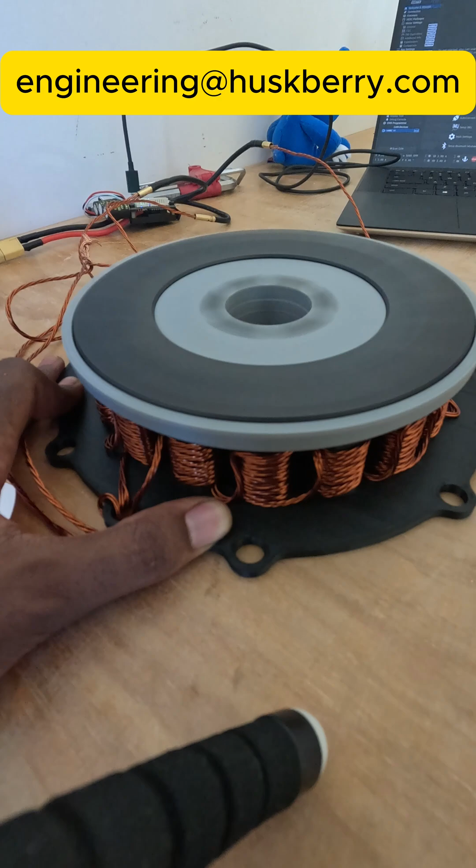I've been working on an electric motor for the last 3 years, and I've gotten to a point where I am ready to start prototyping.

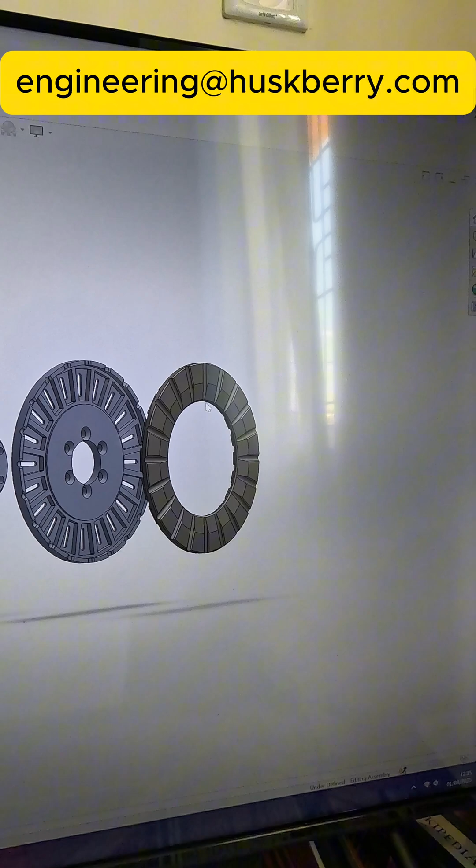So this is the rotor section. The rotor section rotates, and it happens to have trapezoidal sections of permanent magnets, arranged in alternating order: north, south, north, south, north, south, all around the circumference of the metallic disc.

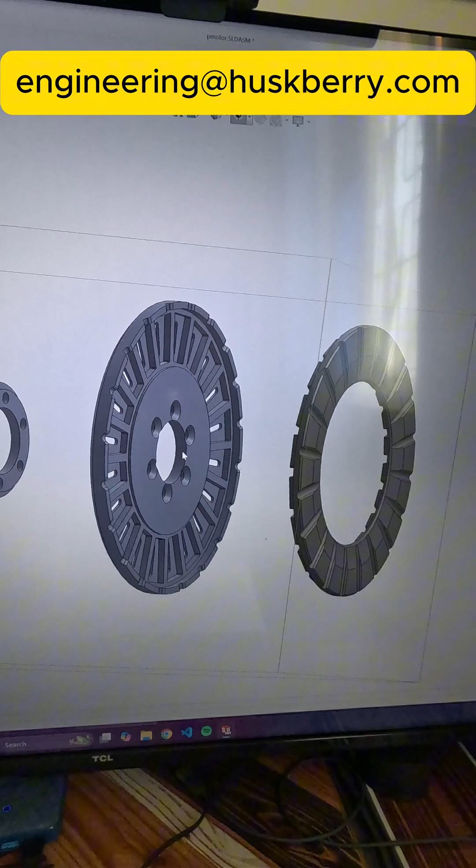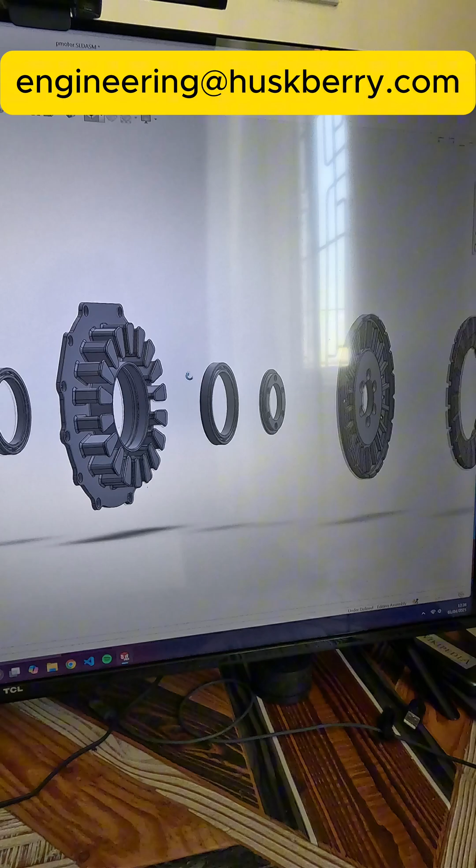This is a plastic disc that I'm going to temporarily use to test this. It's currently being 3D printed. I have some bearings here, and the bearings hold onto the shaft, which is this. Then this is what we call the stator. The stator holds onto the copper windings, which help to commutate or rotate the motor, given a couple of signals from a controller.

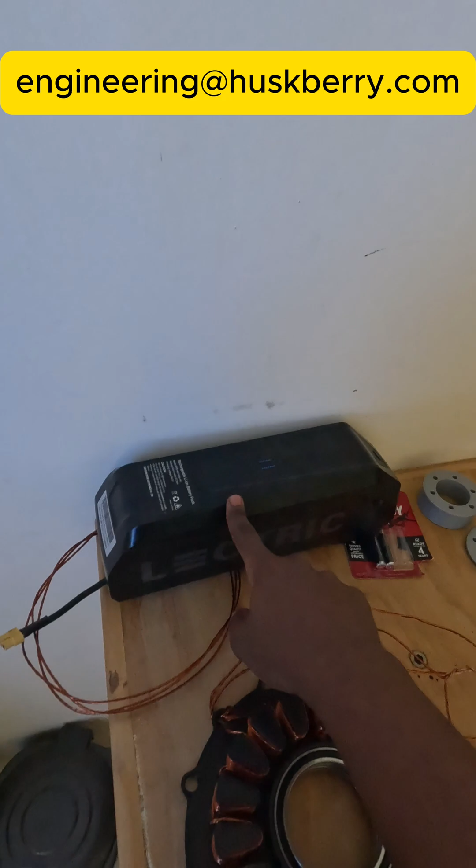Let me move on to my workstation. I have my 48-volt battery, which came from an e-bike battery. This is the stator you were seeing, which is 3D printed. Ideally it should be made out of some metallic material that I currently do not have and is quite expensive to prototype with, so that's why I ended up going with 3D printed material.

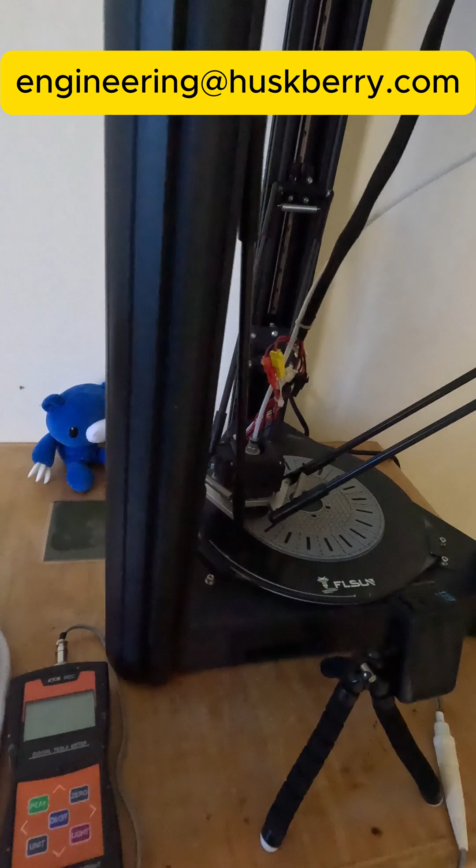You can see my wires are already wound around the different sections, the different slots and sections. This is the shaft I'm going to be using, and it slides on quite well. I already had printed this disc, but I need to redo it, and the reason for that is I wasn't paying attention when I was doing this disc.

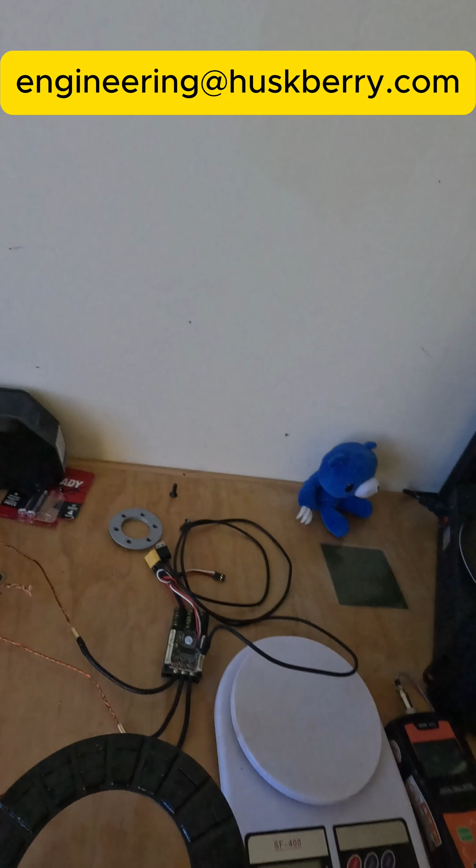Unfortunately this metallic disc that holds onto the magnets, these trapezoidal sections of magnets I was speaking about, does not fit into this. We're currently at 2 hours and 34 minutes, but let's move on.

So this weighs 704 grams, and let me turn on the Tesla meter. This is used to measure how strong a magnet is. We are reading something like 400 millitesla.

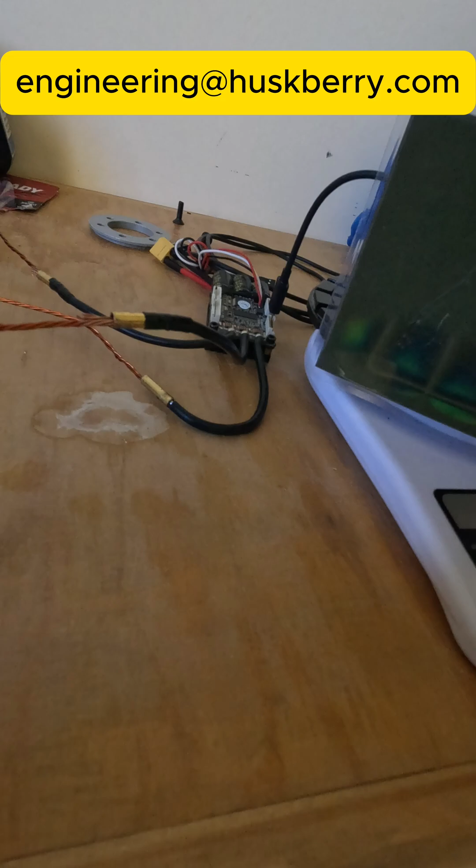This is north, this is south, north, south, and it goes all around following the circumference of the disc. You can see the magnets are actually active using this magnet paper. This is what it looks like from the top section.

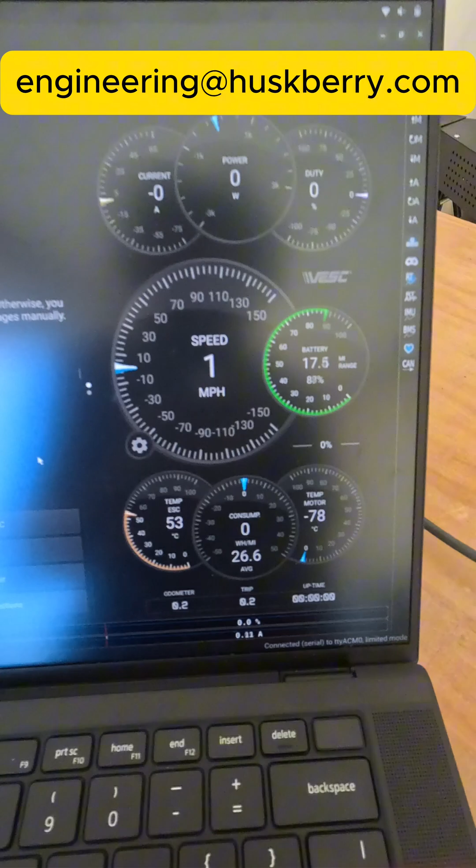The next thing I need to do is basically connect my controller to the computer and configure it for this motor. And then we are going to see an electric motor. I believe this is the first of its kind in the country, probably in Africa.

If you are interested in the kind of work that I'm doing, these electric motors are actually meant to be used as traction motors, the ones used in electric vehicles. This model that I'm currently testing is simulated for up to around 60 kilowatts, and I have other models simulated up to around 200 kilowatts. It really depends on what you need.

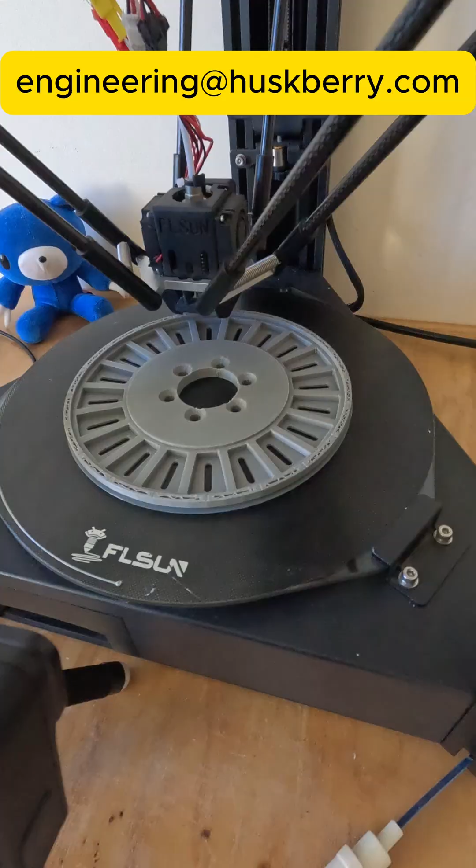We are almost done, still going, currently at 95%. It's been 4 hours. Up next, I'm gonna bring my computer over to start the testing.

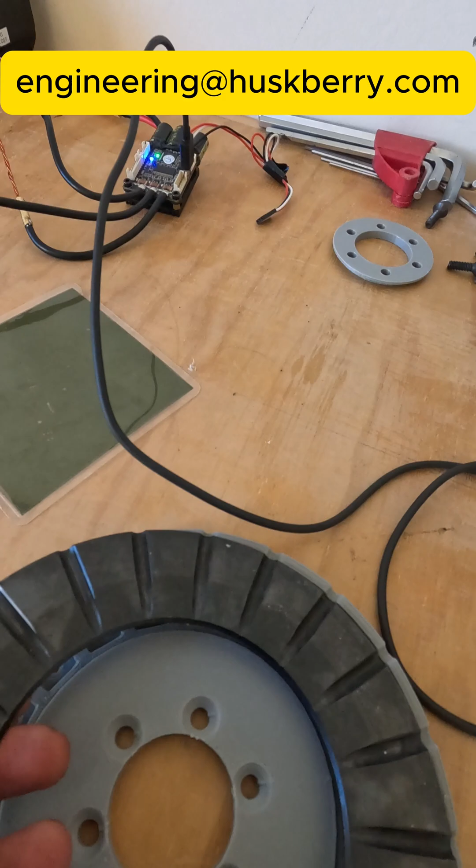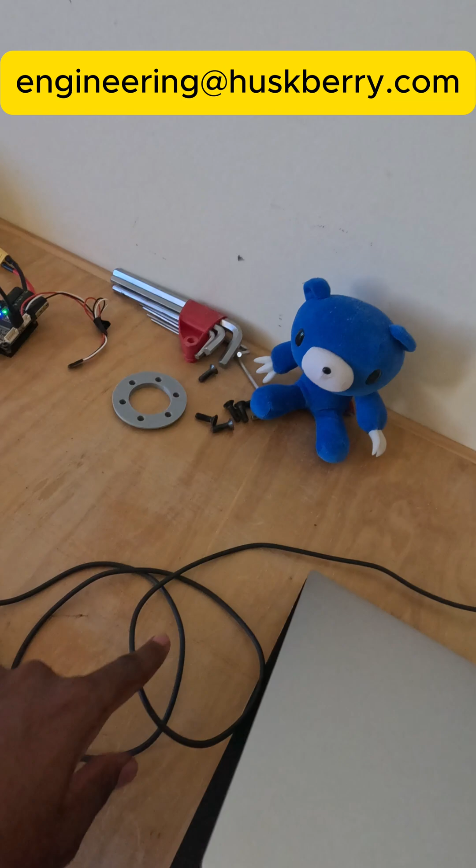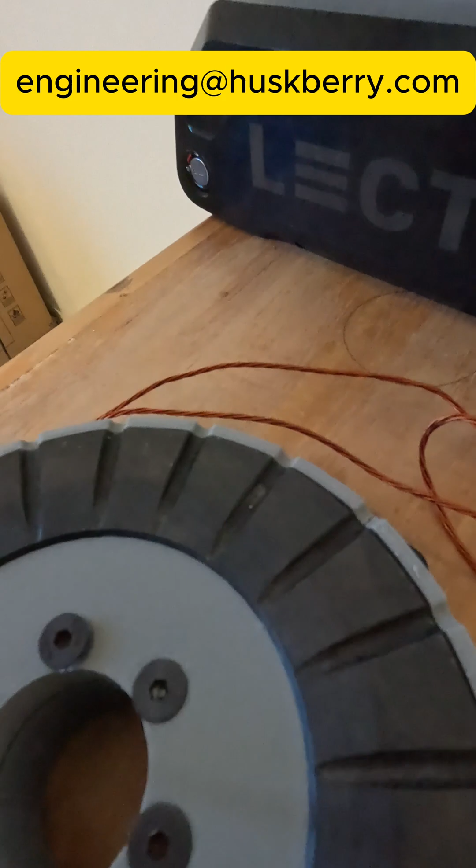The disc just finished printing, and I'm going to proceed with the installation. Now I need 2 hands for this, so I'm gonna do this off camera, then do the setup. As you can see, the controller is already set up and connected to power, the main power. The stator is already connected to the controller. Now all I have to do is assemble this, and I have my hex screws ready to assemble everything, then I'll do the first run.

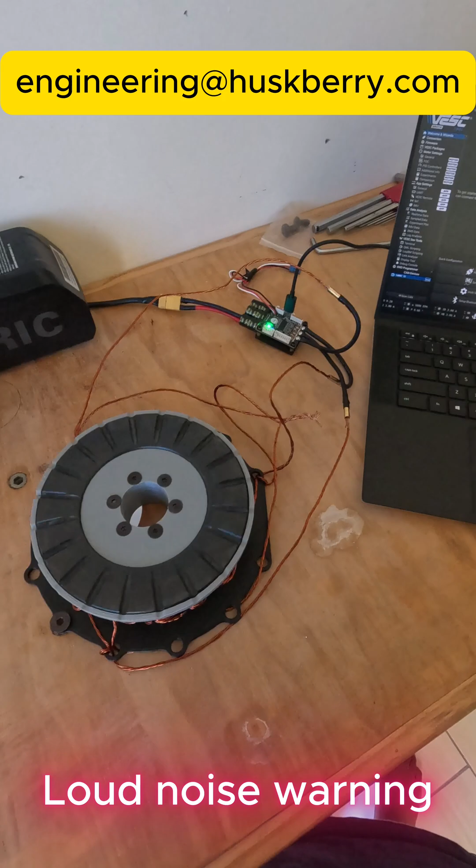I've got my setup done, and I'm going to be using the arrow key to control the speed. It's a bit jerky at the beginning, and that's because it doesn't have a position sensor.

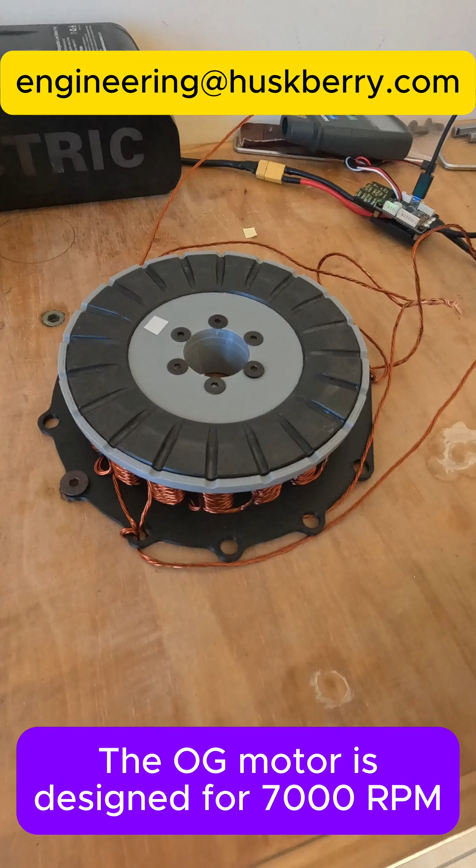Something might have broken at some point. I've already done the initial test, so we're looking at 1600 RPM, which I don't think is that bad, and the motor is actually running quite hot. I definitely think there is a lot of resistance, so we're looking at around 52 to 54 degrees Celsius. There's a lot of resistance in the wires because the motor doesn't have position sensors.

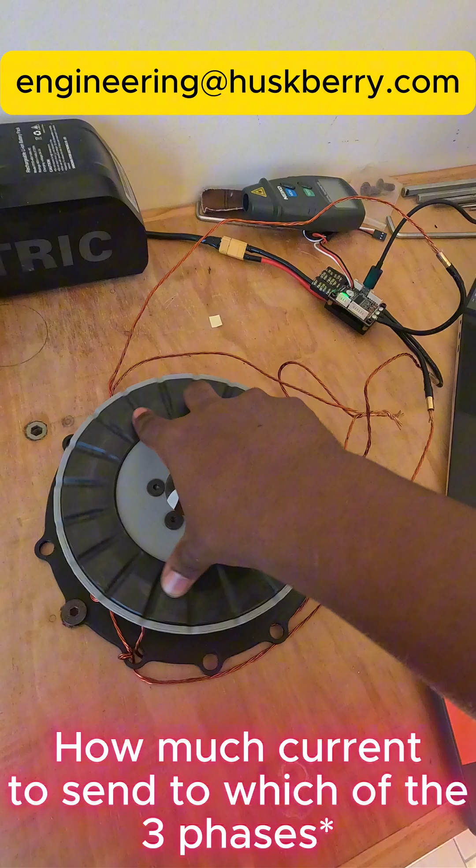The position sensors basically tell the controller where to send the power depending on the rotational position of the rotor. The fact that I don't have positional sensors is what's creating that problem of overheating. It's not too hot to the touch, definitely.

I could definitely do a very noisy run, but it's okay. I think I've got my proof of concept down. There's a lot more to do when it comes to building this electric motor, and I'm definitely going to be working on improving some of the things I've noticed about it. So this is not the complete version of the whole thing.